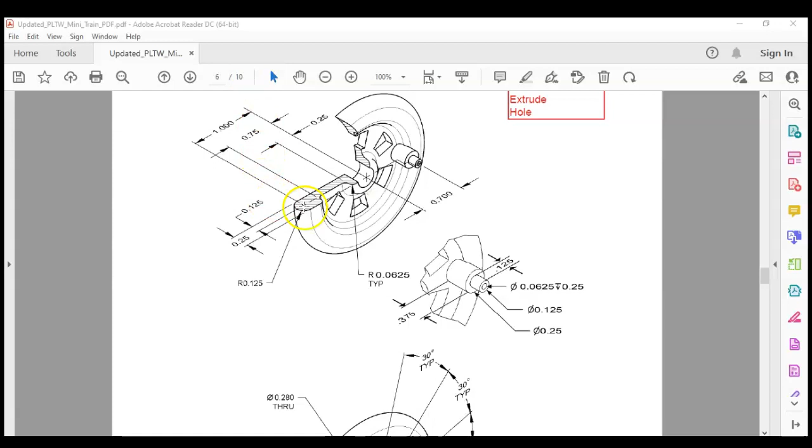Out of all the parts, the wheel is probably the hardest for students to draw. There is a lot going on. We have 3 different views, and we have to create the wheel, and then we have to add some features to it. So there is, like I said, a lot going on.

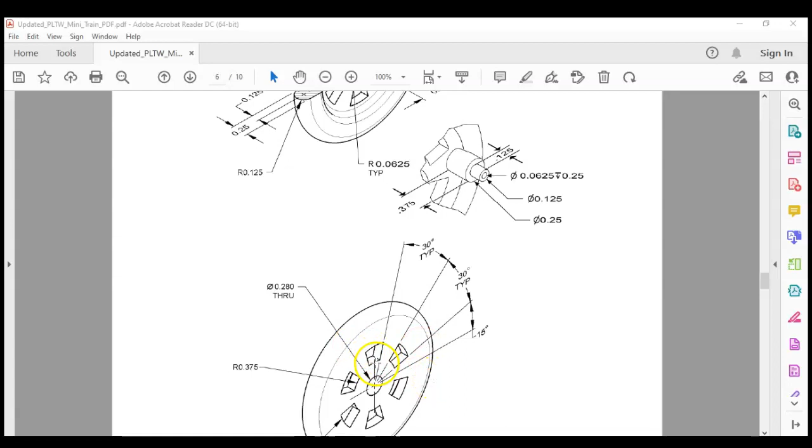Starting out, we have to get the wheel drawn. Then we'll add some features: the spokes, and we'll scroll down to the linkage arm, where that attaches. The linkage arm will attach the front wheel and the rear wheel using this feature here.

But starting out, we're gonna use the revolve tool, and so we have the profile, we have dimensions. Like I said, it's kind of intimidating looking at it, but once you understand what you're given, it's fairly simple to draw.

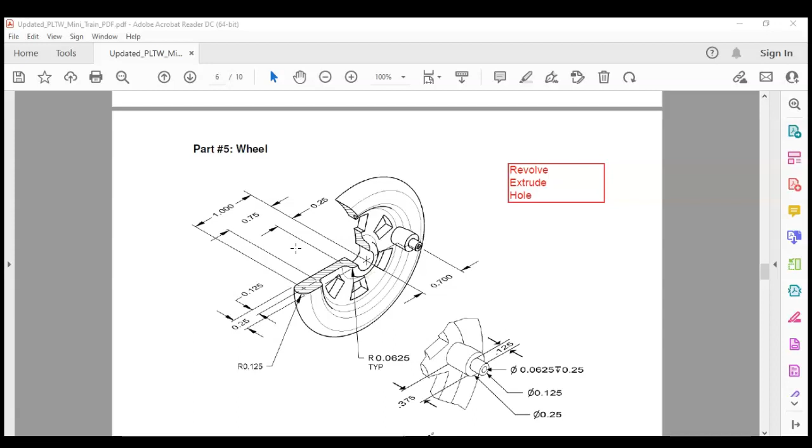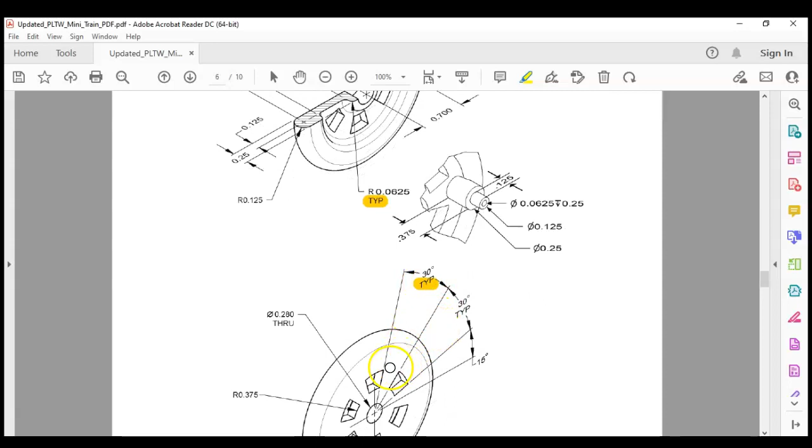Looking through, there's some new things in our dimensions. The TYP here basically means, and we'll see it here on the degrees, that the other dimensions are the same. So they don't give us the dimensions for each spoke here. What they're saying is that we can assume all the way around they are the same dimensions.

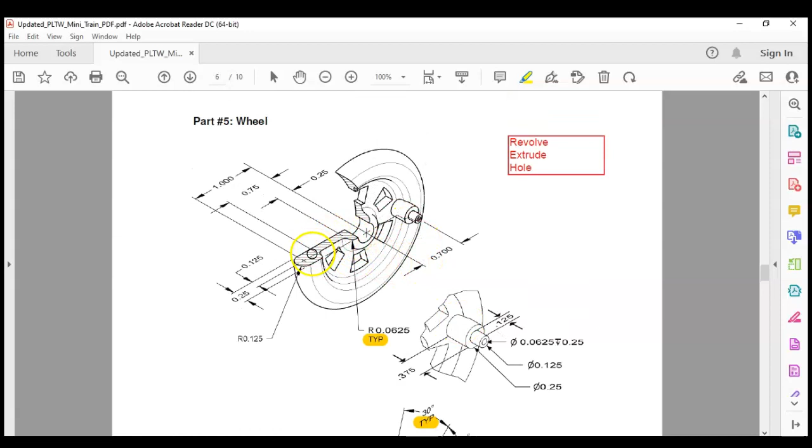So we'll go ahead and get started. We're drawing this profile, and then we will revolve it, and then we'll add the features: where the linkage peg will attach, and then we'll add our spokes and our center hole.

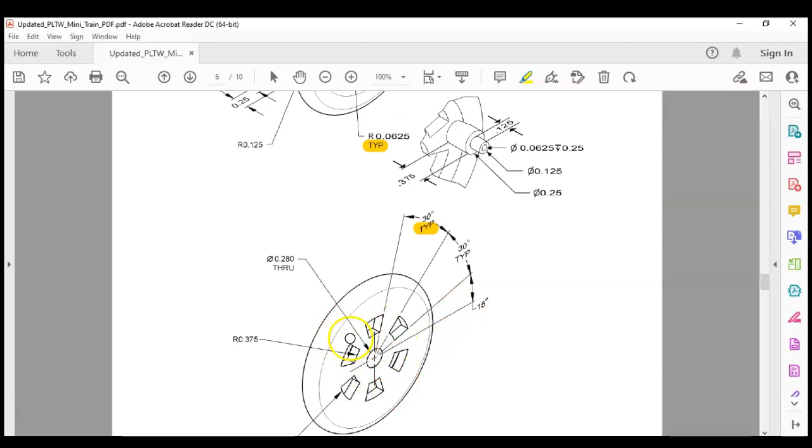Using extrude, we'll add material for the linkage arm, and extrude to remove material for the rest of this. You can use hole for the center where the axle peg will go, or we can use extrude, either one. We'll go ahead and get started.

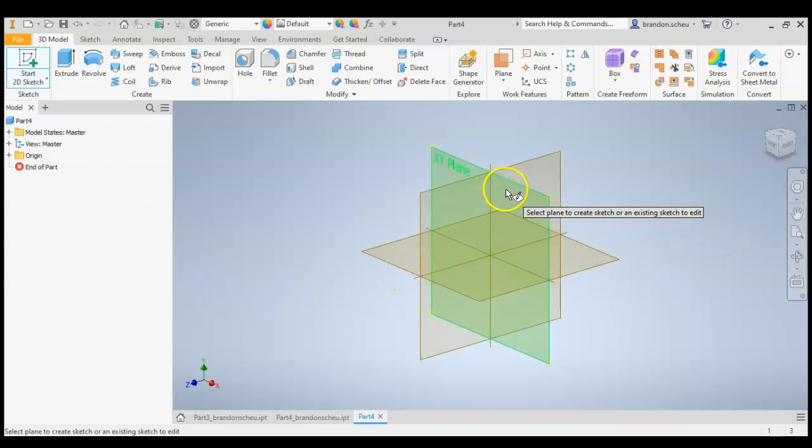We're going to start with the IPT, start a 2D sketch, and then I'm going to use the XY plane. Like I said, the plane doesn't necessarily matter on this, but I know a couple of features that I have.

I know from the center point of my wheel to the center point of this radius at the end, it is 1 inch, and so this wheel is kind of rounded. If you're looking at the edge profile, it's rounded, and that's what we're drawing - that profile.

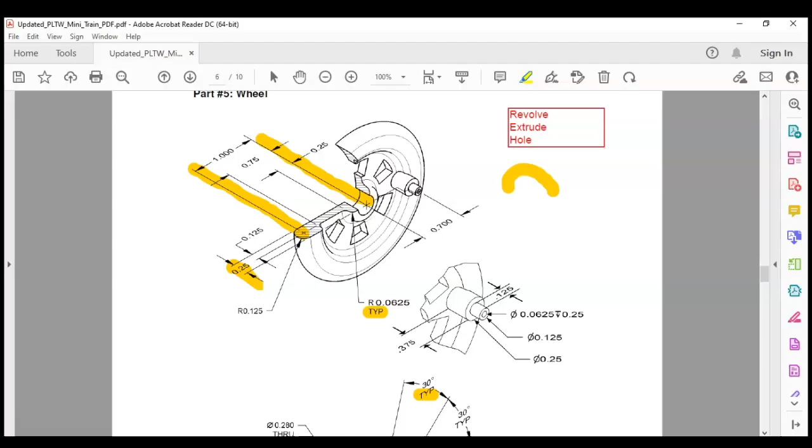So I'm going to draw - I know it is 1/4 inch wide by 1 inch. And so I'll draw that starting out. I'm going to draw a rectangle, 1 inch wide by 1/4 inch.

And then I am going to add - now there's several ways you can go about this - I'm going to add a circle, a 1/4 inch circle here at the end, and then I'm going to trim.

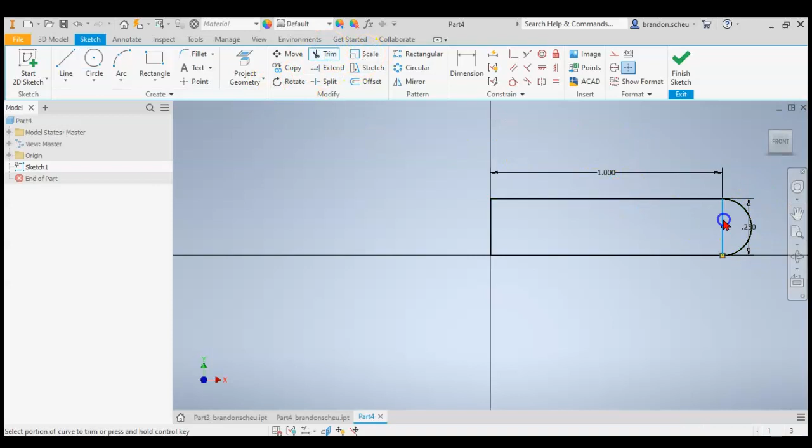And so now, when you see this, I tried to trim and it popped up with this warning here. What it is, I have dimensions on this, so I need to remove the dimensions, and then I can delete, or I can trim, either way.

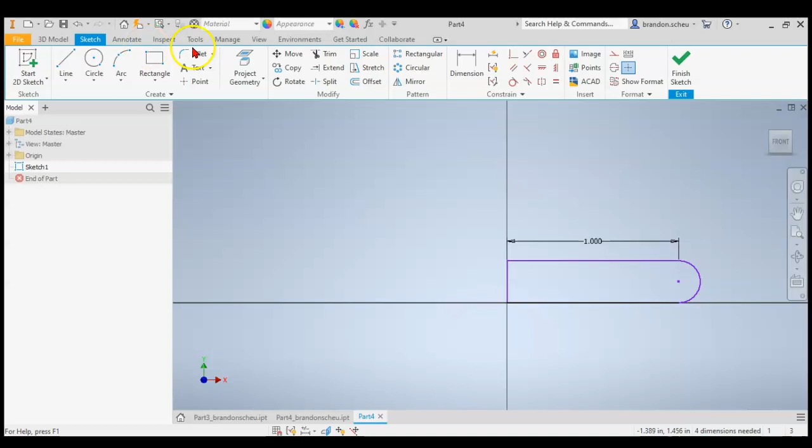Now I have, like I said, the width here. I have this curved profile that is the edge of my wheel, and then I can start adding features from that. And so from my center point...

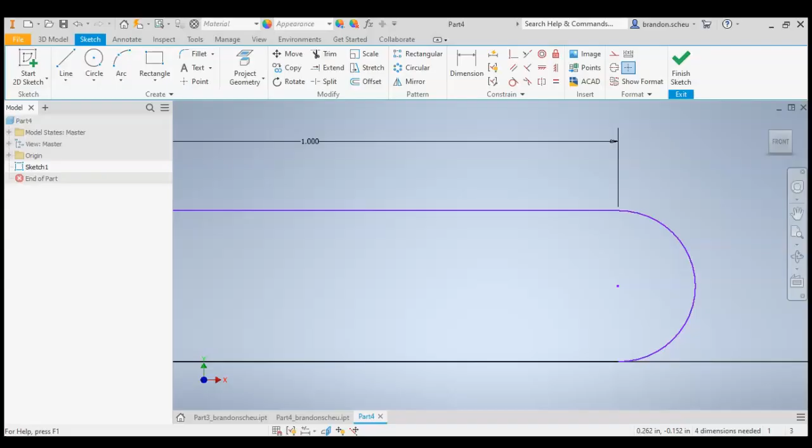I know I have this 0.75, and that is basically - it's a rectangle - it is 0.125 wide. So I will just come at a rectangle, and then it's 0.125, tab 0.125 tall, and then it is 0.75 wide, so 0.75.

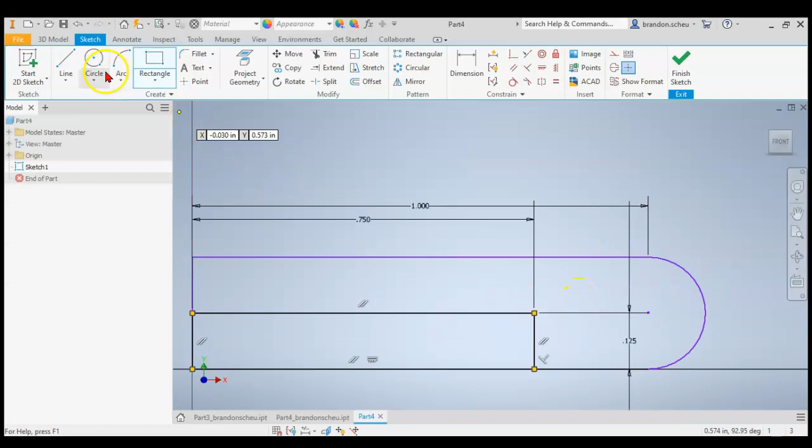And I'm wanting to keep the full 1/4 inch out here on the edge, and then it narrows down to 0.125. And then if we look at where our hub is, or the center, it is 1/4 inch wide, and it is the full 1/4 inch tall.

So we will add another rectangle, 1/4 inch by 1/4 inch, and then I'm gonna remove some dimensions. Like I said earlier, we had the warning.

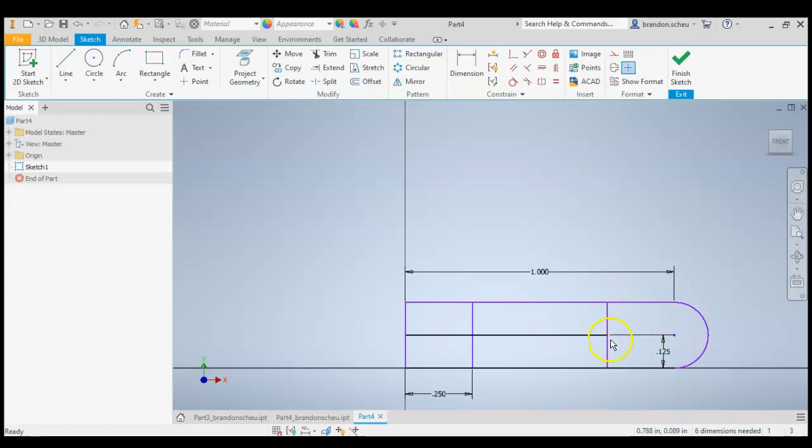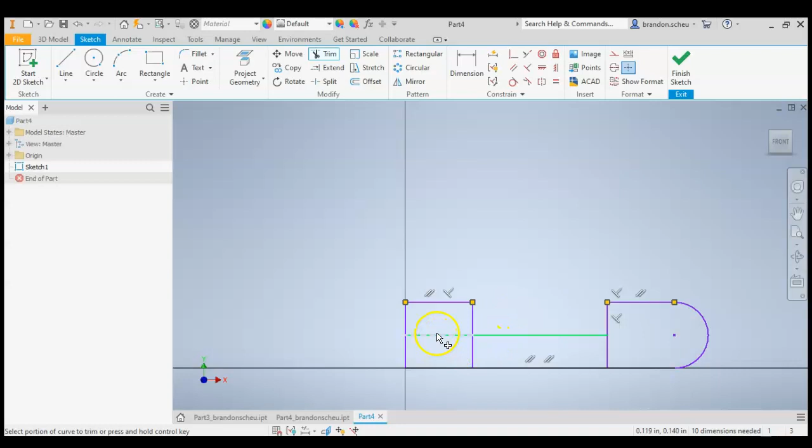Sometimes when you have dimensions, it will not let you trim. It won't allow it, so I'm going to remove the dimensions. Now I can kind of start seeing the shape that I want. So I will trim the center part here, and then I'm going to trim these 2 lines there and that line there.

So now I see, if I were to revolve this, I have a rough profile of my wheel. Now you can see here the radius - this is a fillet, 0.0625. You can see there's several areas that have fillet on them, and you can do the fillet after you revolve it, or you can go ahead and do it while you're sketching.

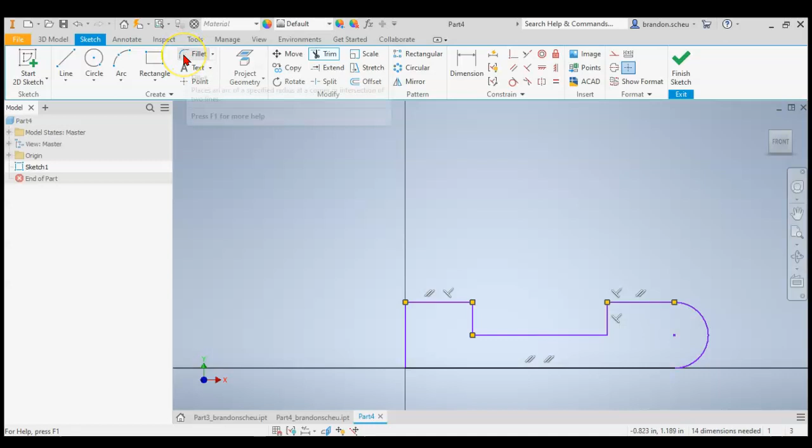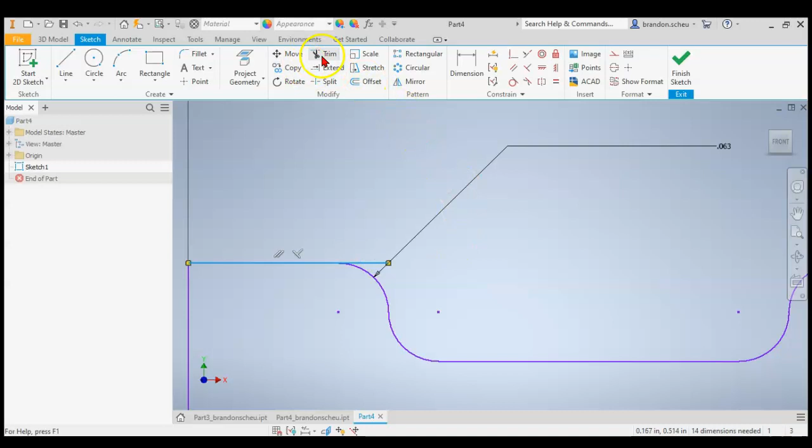So we'll do it while we're sketching. Select it, 0.0625. Then you'll select the corners that you want filleted, and we'll come see what's going on here. We'll trim, and so now it looks a lot more like what my wheel should look like.

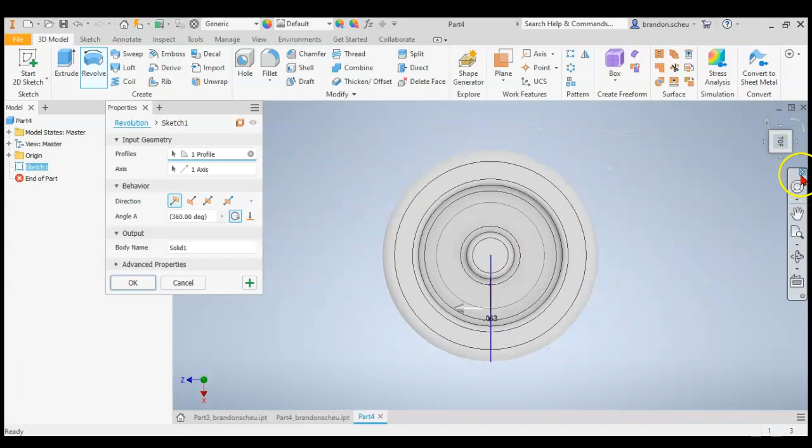So I'll finish sketch, and then I'm going to revolve. Like I said, I'm revolving this profile around the axis there. And you can see now I have starting to have something that resembles my wheel. So I will select OK.

Now I'm going to change the view. I'm going to select this as front, set current view as front, and so now that'll make it a little easier to work with.

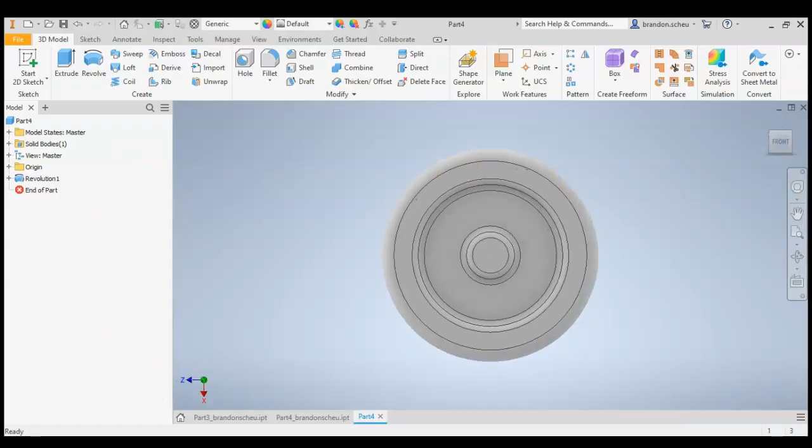Now I'm going to add where my spokes are, I'll go ahead and do that first. You can see in our drawing there that we have the spokes, and then we have what we have coming out for our linkage arm connection. So we'll draw these spokes on the back.

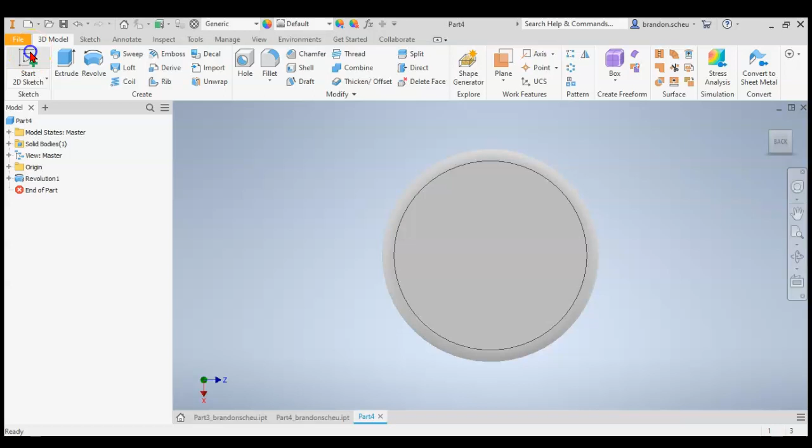So I'm going to rotate to the back, start 2D sketch. I'm going to project geometry, and kind of have an extra. Hit escape, we'll remove that, and now we'll look at our dimensions.

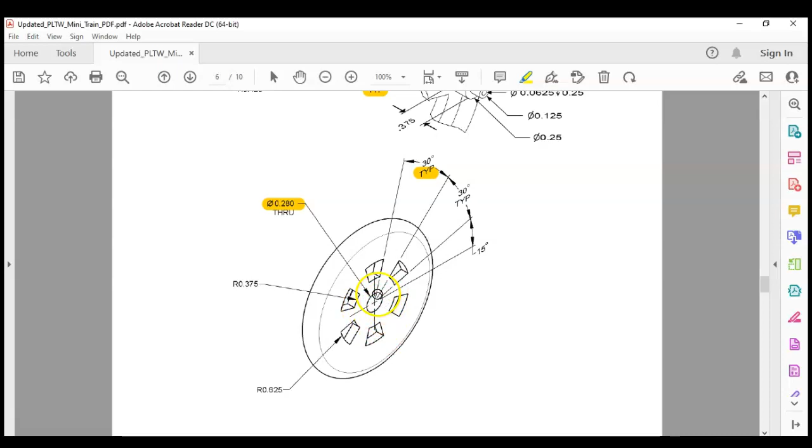So we know our center hole is 0.28 inches through, where our axle peg is going to go, and then we have basically 2 circles. The inside circle is 0.375 radius, and the outside circle is 0.625. Again, that is radius - remember, R is radius. Some dimensions we are given were given as diameter, some were given as radius, so make sure you're careful with that.

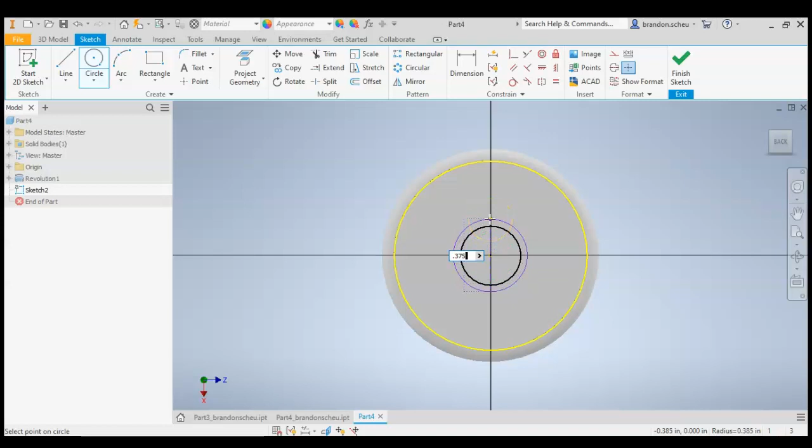We'll get those drawn first. So we'll go to circle, 0.375 times 2, because when we draw using the circle tool, our dimension is the diameter, or what we input is diameter. I'm going to go ahead and remove that geometry.

Circle, the second one is 0.625 times 2. Hit escape. Again, let's double check here - 0.625 times 2, and then our other one is 0.375 times 2. Like I said, we're given the radius, so we want to input the diameter, and then we have to draw some lines to create our spokes.

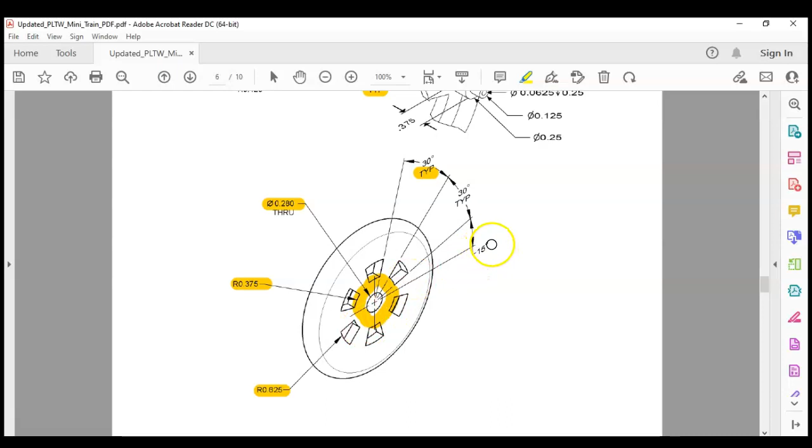So our first one is 30 degrees from, we'll start here, 15 degrees. We'll go from, and we'll draw it like that. So from X, we'll go up 15 degrees, and that'll be our first line.

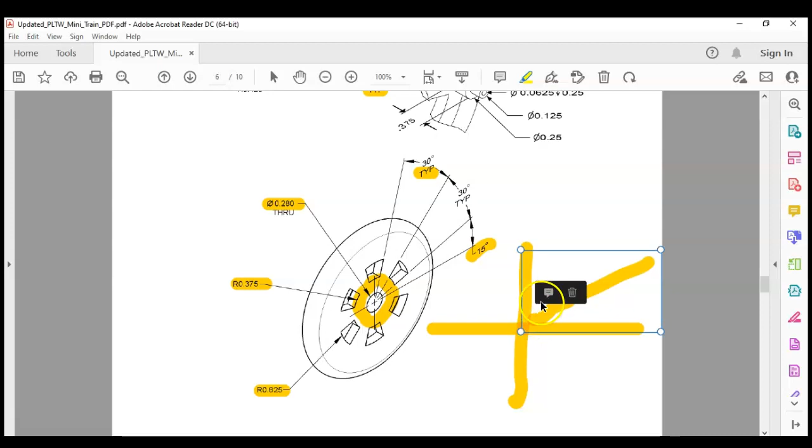And then from there, we'll go another 30 degrees, and so on and so forth. You kind of gotta pay attention to how your degrees is - so right now we're at 90, so we're doing 90 plus 15.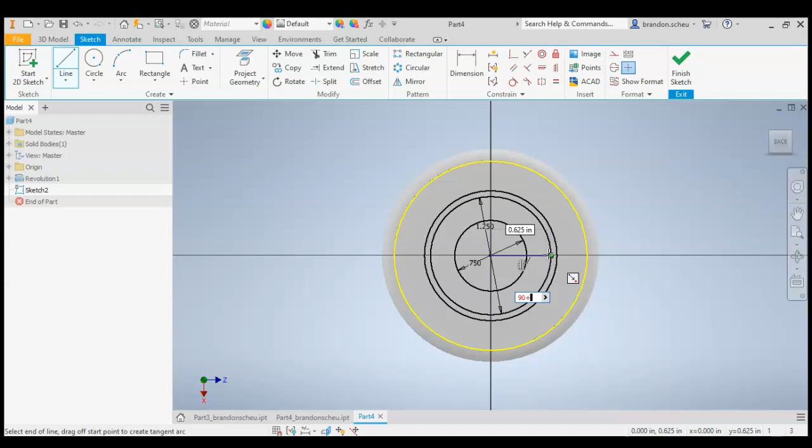Enter, and then we're going to do 90 plus 45, so we're going to add the 15 and 30 together.

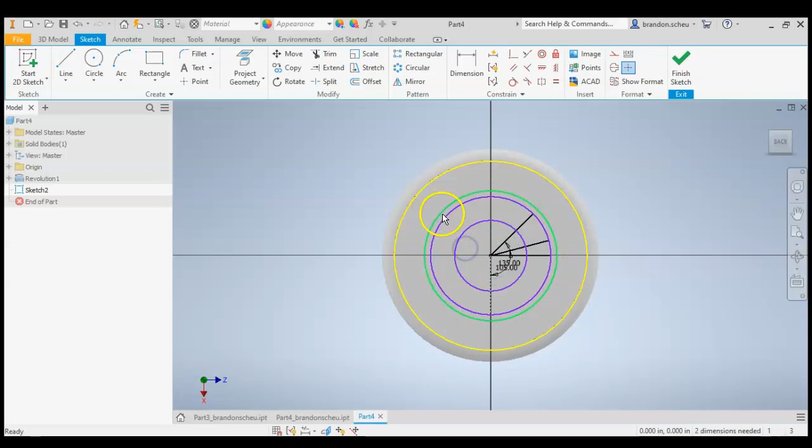And then I'm going to trim, so I'm going to remove the dimensions. And I'm going to remove some of... what I'm doing is just kind of cleaning up the work area here. So I'm going to trim.

Instead of drawing each spoke, which you can do and there's nothing wrong with that, and I will add this to our PDF here, we're going to use the circular pattern.

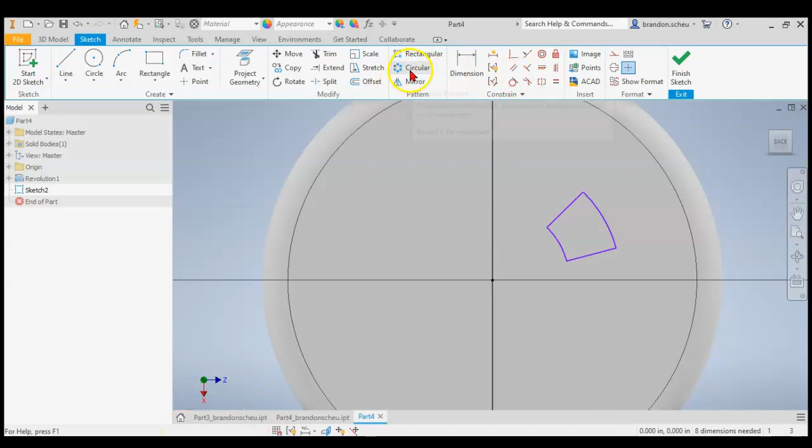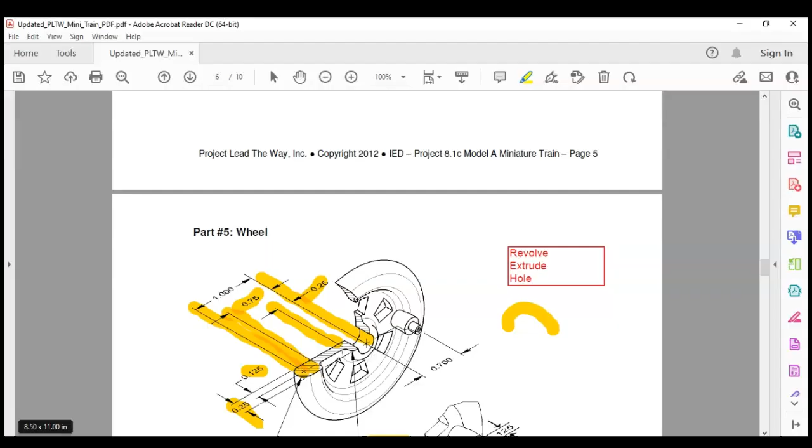So what we can do is select our geometry. I'm going to do circle, select my center point, and I want it to go 360 degrees. We'll look and see how many spokes we have. So we have 6 spokes, and what that does is create based off of that geometry, and we select our center point, and it'll create our geometry for us without having to draw each individual spoke.

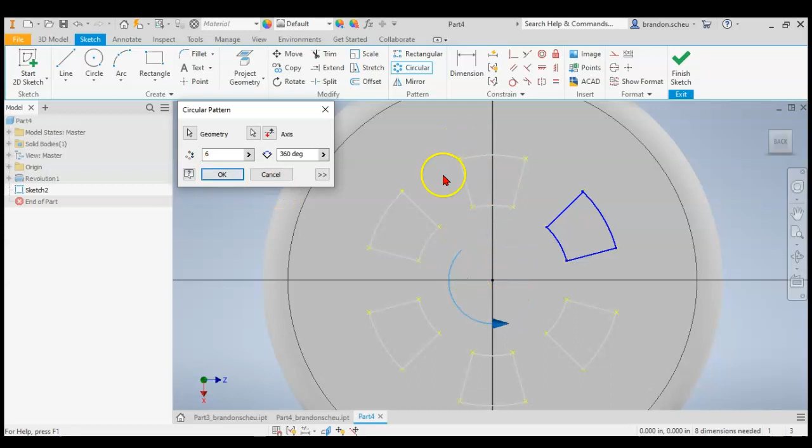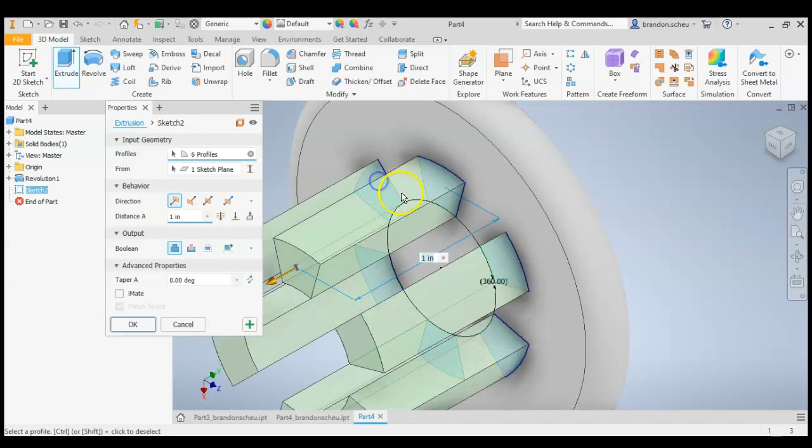Now you can do that, it's a little more time consuming, so we have that done for us. And then we will finish sketch, extrude, and we'll select the geometry. And we want to flip it so it removes material.

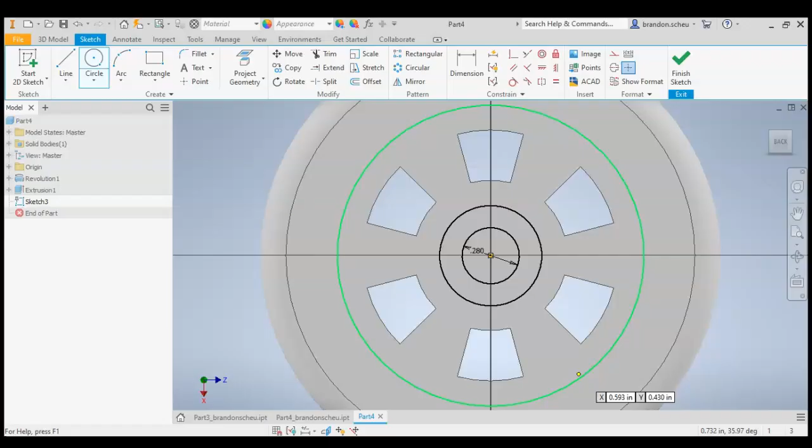And one thing I didn't add, we'll do that now. So we could have done it at the same time, we'll do it now. We're going to add our circle for our axle peg. So that is 0.280, we'll double check, but 0.280. We could have done it at the same time. We'll finish, do the same thing, flip it where it will remove material.

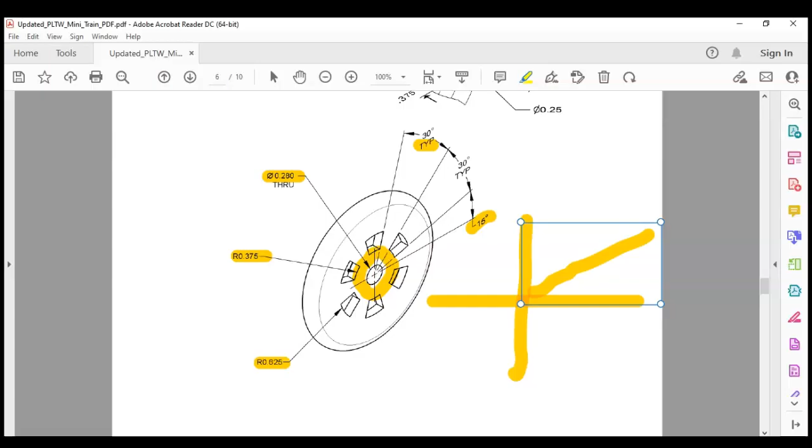And now we have our center hole for our axle pegs, we have our spokes. And now the only thing we have to do is add our peg for our linkage arm. I call it a peg, there's actually a linkage arm peg that is another part, but it's where the linkage arm is placed in the assembly, and then our peg is inserted into that.

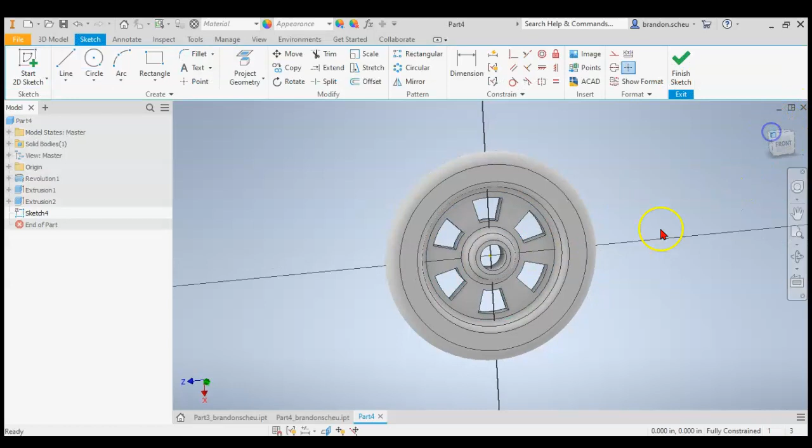So this is off of the front, and so we will start our sketch off of our front face. We're doing it off of this inset face here, so we'll make sure we're doing that.

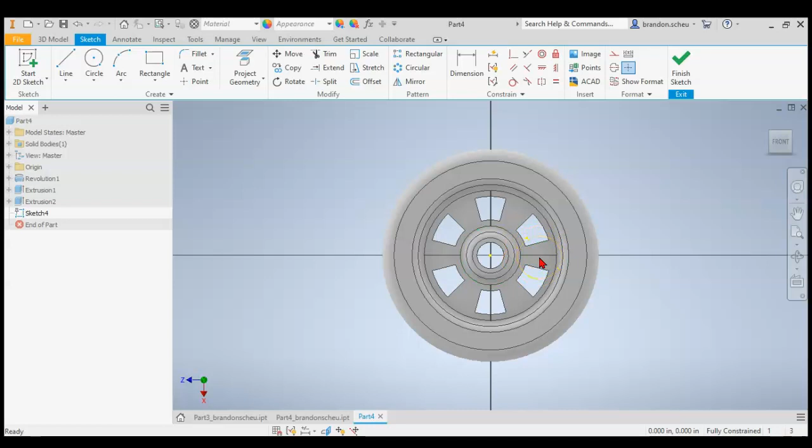Now, one thing you can do that I always find real helpful is I can remove it where I'm just drawing on that plane. So what I used is F7, and we're drawing on this inset face here, so I can remove everything that is in front of that, so to speak, and just draw. So basically it's just kind of slicing it to the plane we're drawing on, and it makes it a little easier to see what we're drawing.

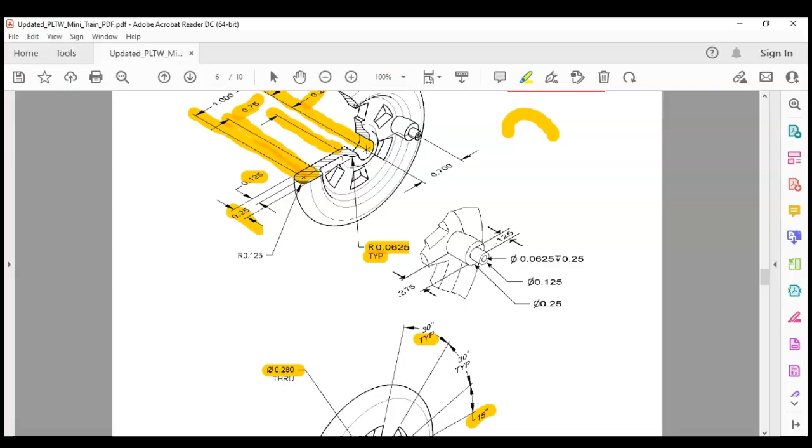And so we'll come back. If we look at the top here, from the center point, the center to center is 0.7 inches, and then it is a 1/4 inch, and then so we'll draw this first part, the larger diameter first, and it's extruded 0.375 inches. So we'll get that drawn first, and then we'll draw the second part.

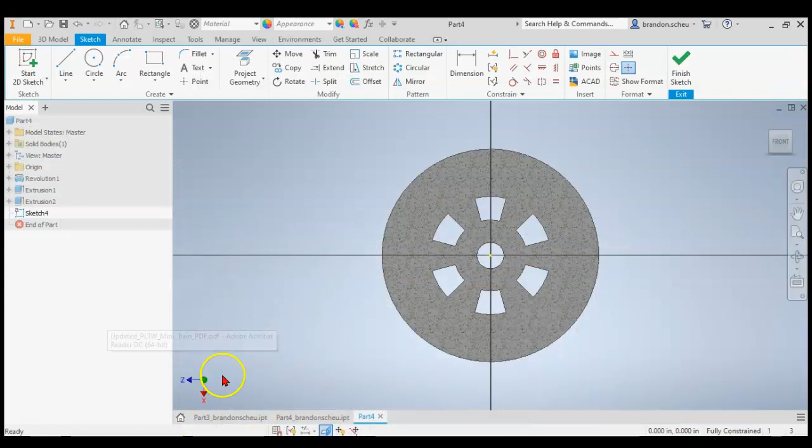So I'm going to project geometry, 0.7, enter. Yep, let's try it again. 0.7, enter, and then it is a 1/4 inch circle, 0.25, and then I'm going to finish sketch.

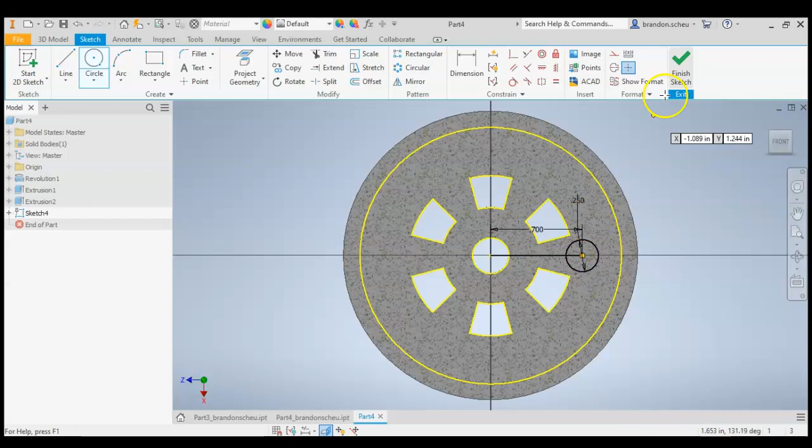So I want to draw that first. I'm going to extrude it. We're going to extrude 3/8 of an inch, 0.375.

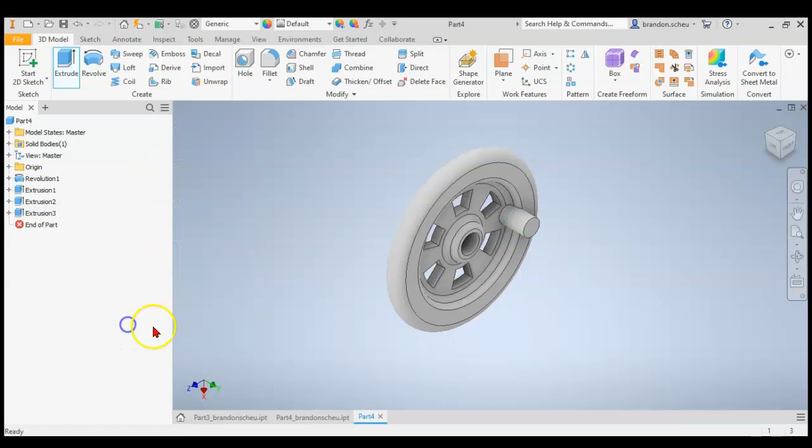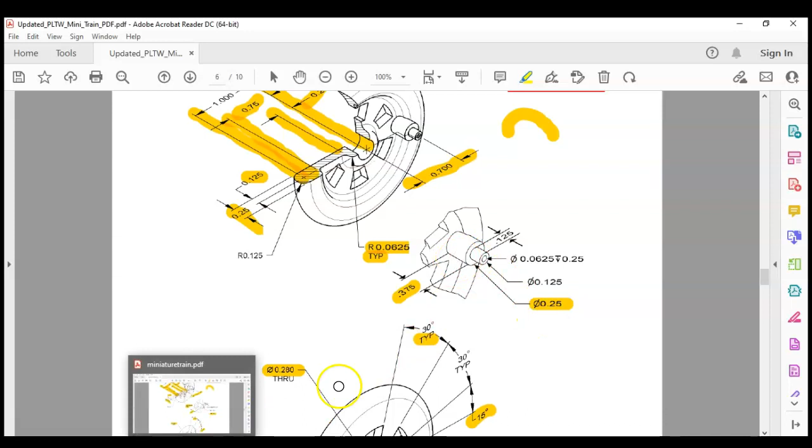And then we're going to draw the smaller attachment. So our linkage arm will fit around that, and then the peg will fit inside of it. So we'll have a couple more things to draw. That is a 1/8 inch diameter, and it extruded an 1/8 inch.

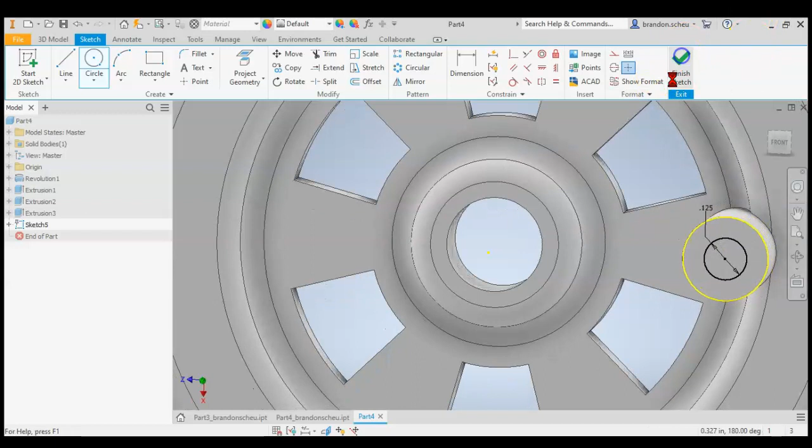And so we'll do start 2D sketch, we'll start it on that face. Project geometry, 0.25, or it's 1/8 inch, so 0.125. It's extruded 0.125.

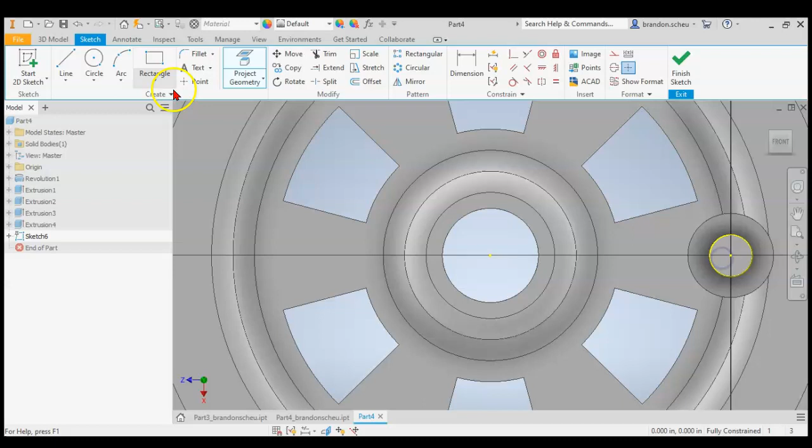Okay, and then we'll start 2D sketch on that face. It is a 1/16 hole, so 0.0625, and then it is a 1/4 inch deep. So we'll do project geometry, 0.0625, finish sketch, extrude. Now this time we're flipping it, and then I'll double check it's 1/4 inch deep, so 0.25, and then we'll select OK.

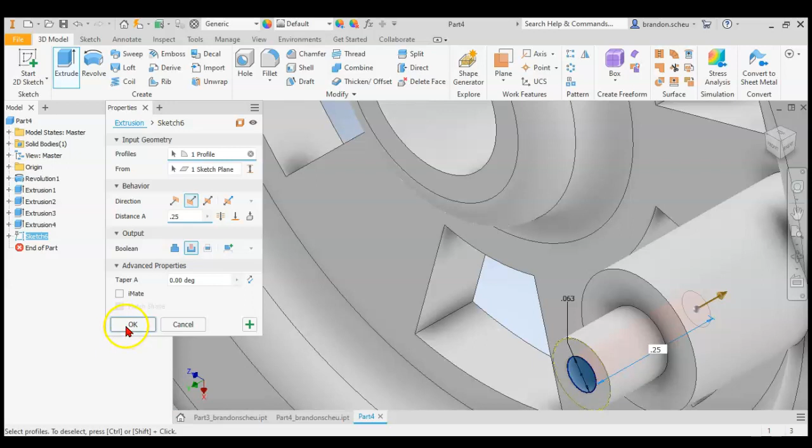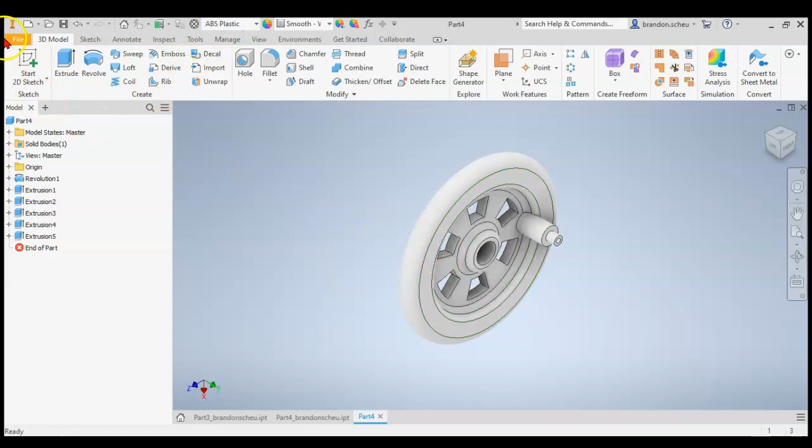And so now we should have all the features of our axle peg. And so we'll go ahead and change our material to ABS plastic. We'll save it, file, save as, and like I said, this is part 5, and then we'll save it, and that is it.

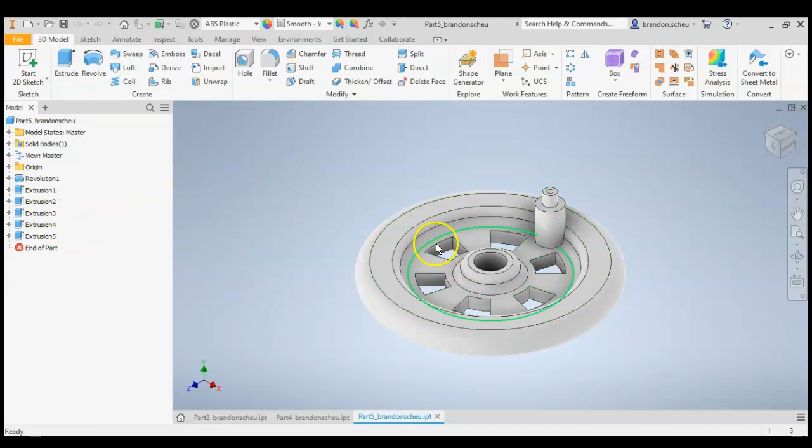So like I said, we revolved it. We drew the profile of the wheel, revolved it, and then we extruded to remove the spokes, extruded for the center hole, and then we added the geometry for our linkage arm and peg.